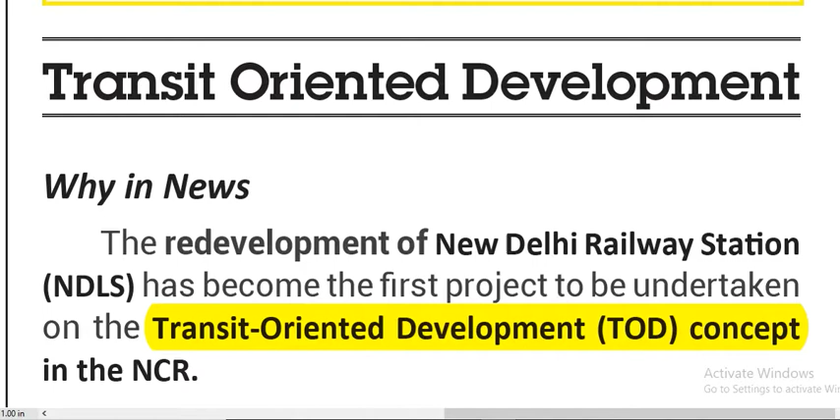Transit-oriented development. The redevelopment of New Delhi Railway Station (NDLS) has become the first project to be undertaken on transit-oriented development. What is this transit-oriented development concept in the NCR region? The project has been approved by the Rail Land Development Authority, which is a statutory body under the Ministry of Railways responsible for the development of vacant railway land.

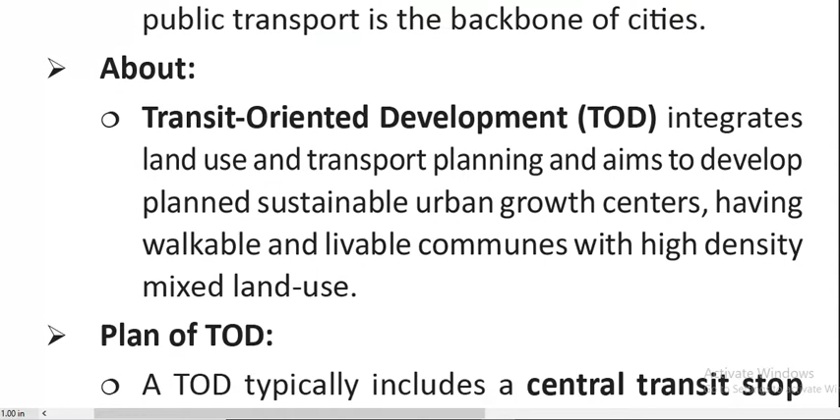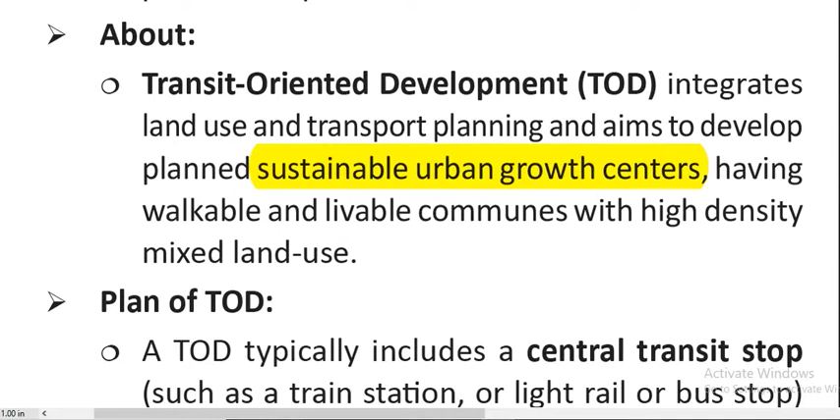Currently, the Indian Railways has approximately 43,000 hectares of vacant land across the country. So the government in recent times has been promoting transit-oriented development, where public transport is the backbone of the cities. Transit-oriented development integrates land use and transport planning and aims to develop planned, sustainable urban growth centers having walkable and livable communes with high density mixed land use.

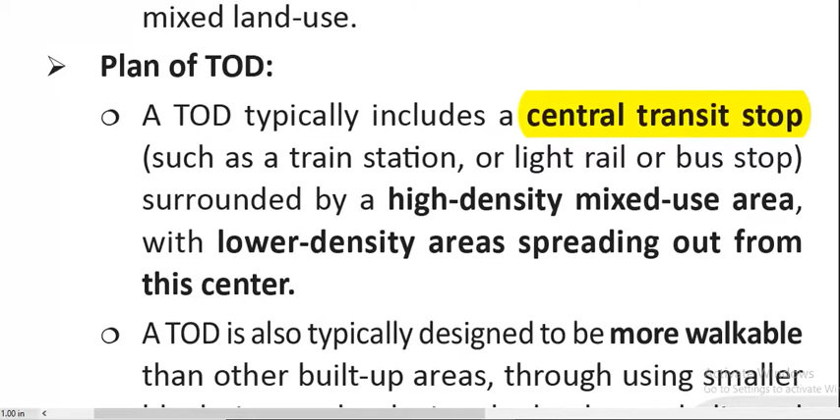What is the plan of this transit-oriented development? A transit-oriented development typically includes a central transit stop, such as a train station, light rail or bus stop, surrounded by a high-density mixed-use area with low-density areas spreading out from the center. It is typically designed to be more walkable than other built-up areas, using smaller block sizes and reducing the land area dedicated to automobiles.

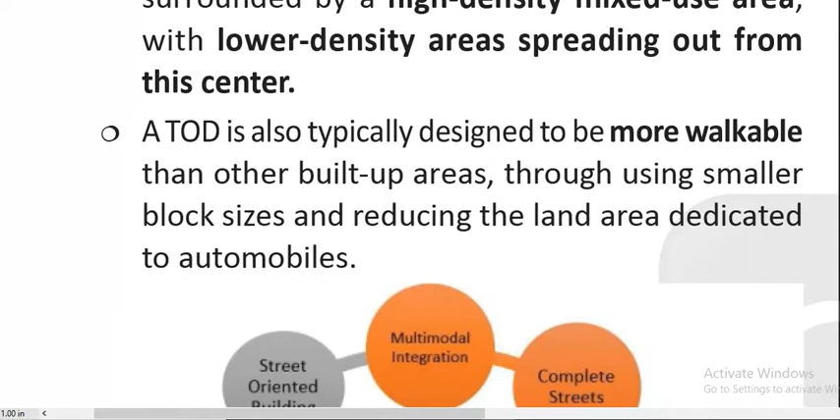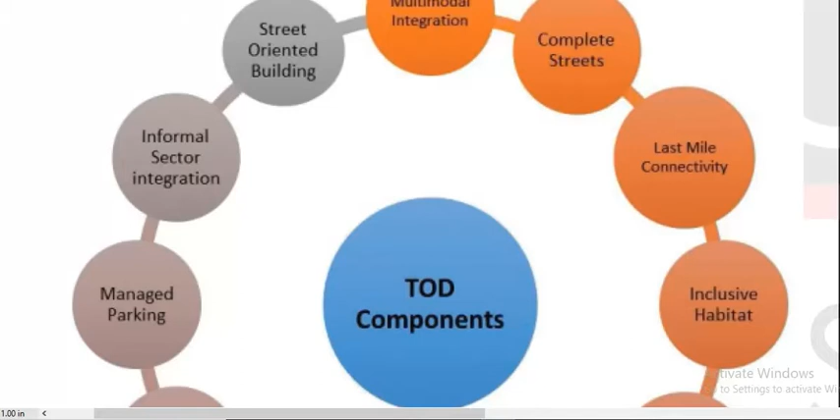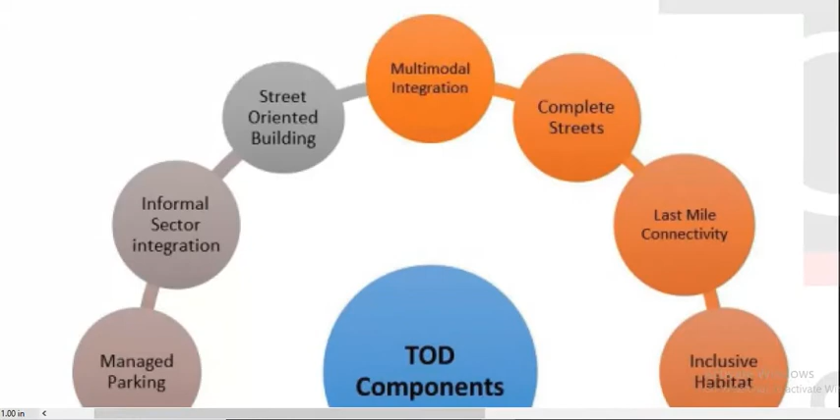These are the TOD components: street-oriented building, multimodal integration, complete streets, last mile connectivity, inclusive habitat, optimized densities, mixed land use, interconnected street network, NMT network, traffic calming, managed parking, informal sector integration, and so on.

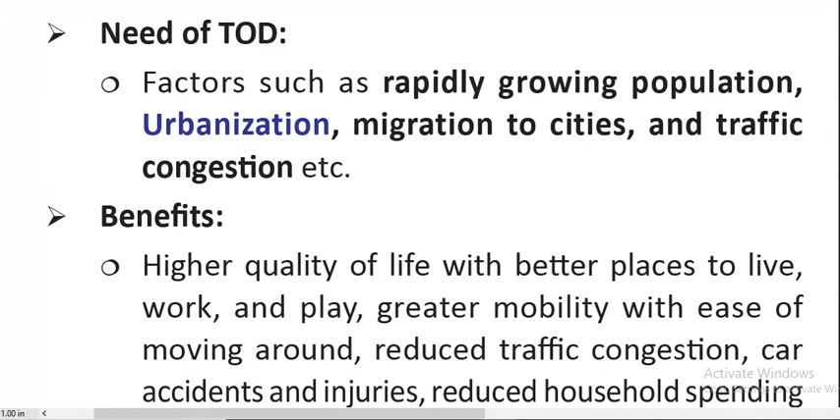So what is the need of transit-oriented development? Factors such as rapid urbanization, migration to cities, and traffic congestion; higher quality of life with better places to live, work, and play; greater mobility with ease of moving around; reduced traffic congestion, car accidents and injuries; and reduced household spending on transportation, resulting in more affordable housing.

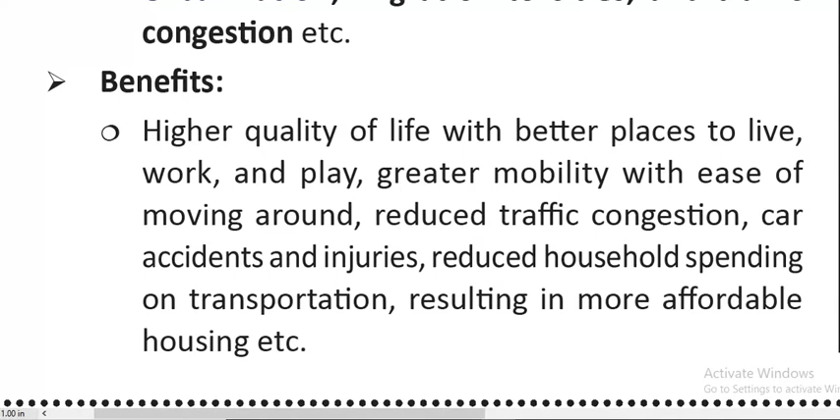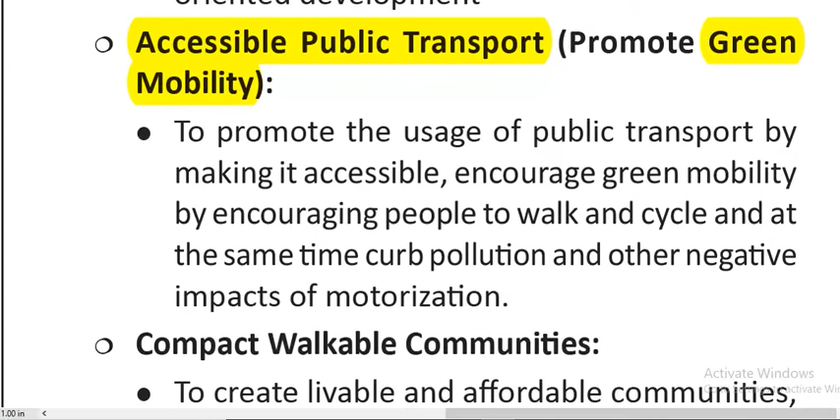Transit-oriented development and the policy initiatives in India. It is based on three pillars: accessible public transport, to assist in transformation of cities from private vehicle-oriented development to a public transport-oriented system; promote green mobility, by encouraging people to walk and cycle while curbing pollution and other negative impacts of motorization; and compact walkable communities, to create livable and affordable communities which are compact and walkable.

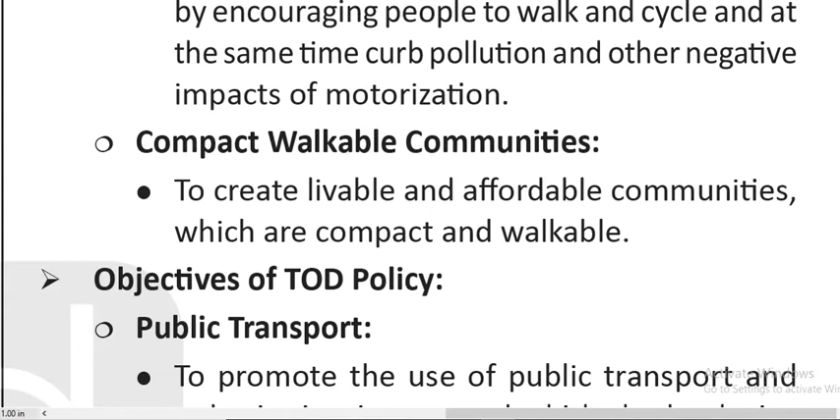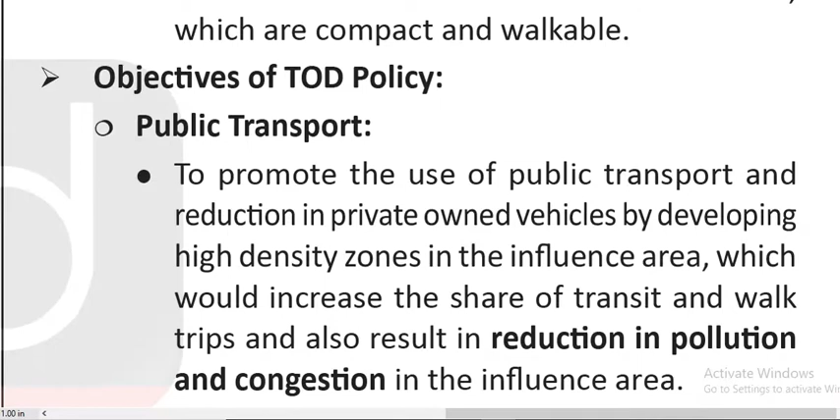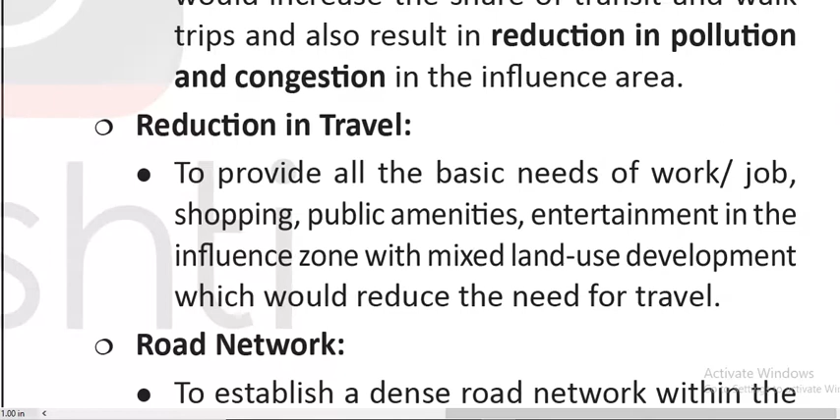Objectives of the TOD policy: public transport, to promote the use of public transport and reduction in privately owned vehicles by developing high density zones in the influence area, which would increase the share of transit and walk trips and reduce pollution and congestion. Reduction in travel, by providing all basic needs of work, shopping, public amenities and entertainment in the influence zone with mixed land use. Road network, to establish a dense road network within the development area for safe and easy movement.

Inclusivity, to develop inclusive habitat in the influence areas so that people dependent on public transport can live in livable communities within walking distance of transit stations, and to integrate economically weaker sections and affordable housing by allocating a prescribed portion of built up area for them. Safety to vulnerable sections, to ensure a safe society with special attention to women, children, senior citizens, and the differently abled by amending building bylaws.

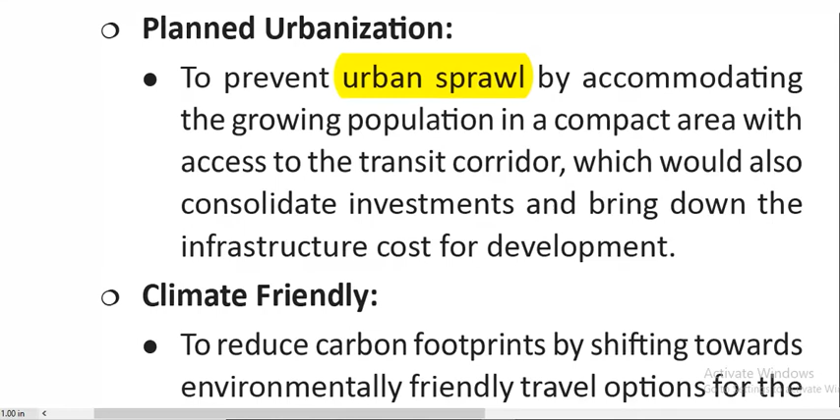Planned urbanization, to prevent urban sprawl by accommodating the growing population in a compact area with access to the transit corridor, which would also consolidate investments and bring down infrastructure costs. Climate friendly, to reduce carbon footprints by shifting towards environmentally friendly travel options for line haul as well as access and egress trips.